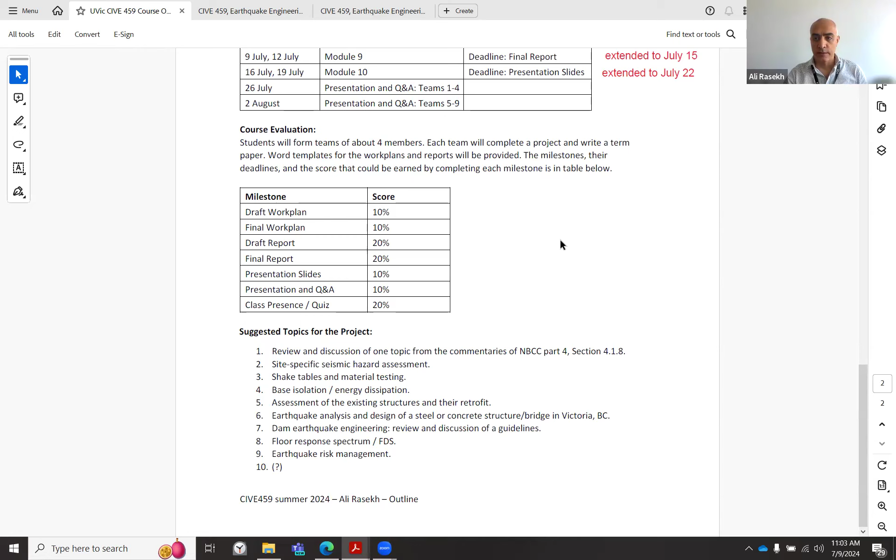We are now at July 9th, so getting close to the end. We were supposed to complete the final report by the end of this week, however the comments were delayed, so we extended it for a few days until the end of the weekend.

Behnam has done a good job leaving comments for you guys, and I'm hoping that it's visible. I asked him if it is visible to students, so write me in the chat or speak up if you can or cannot see the comments. They are reasonable, so if you can see them, start implementing them and really try to enhance your submission for the final. We will need very good reports from the teams. Hopefully you are quiet because you agree and you can see the comments.

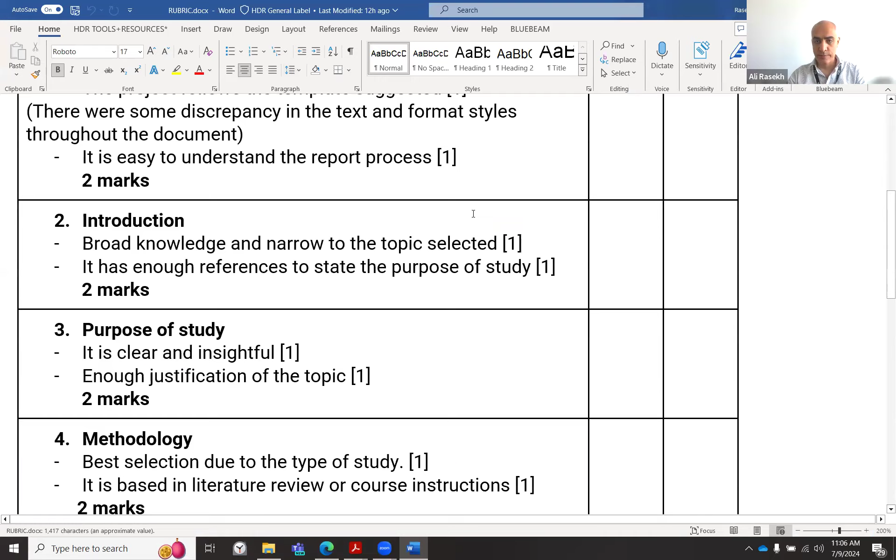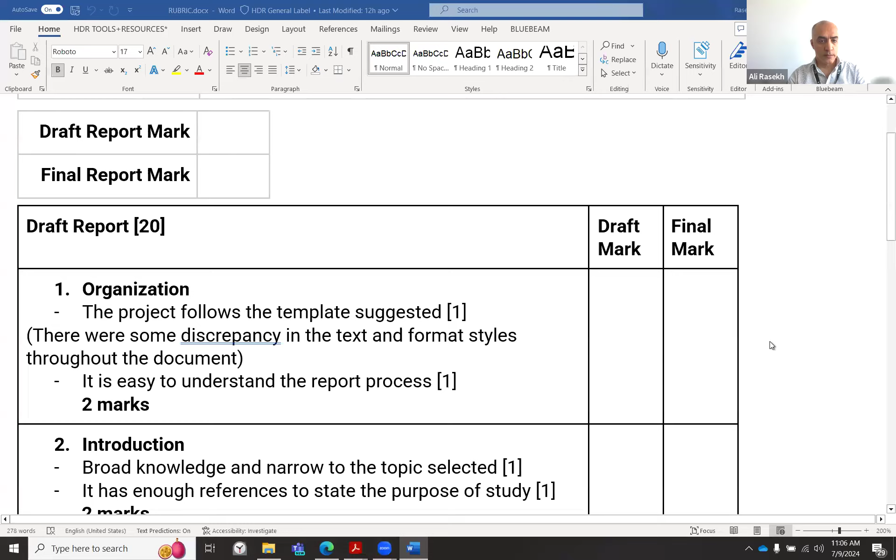So as I said, there won't be any mark or grade, but I can show this to you. Where is it? Under reports, I have the reports here. Just last night I created the rubric so that we mark all the reports in a similar manner, so that it's fair and people are judged or marked similarly. I was slightly late, so marks, maybe we will finish them in a couple of days. But right after this meeting, as you guys said, I will go to the reports one by one and press this publish. Right now, group 1 is published.

Then you go to the PDF, I will put that there. Thank you, like a good question. I will put that. I don't know which team this is, not your team Sarah, but anyway, the comments are embedded in the PDF and you can apply them. I don't know, maybe this group doesn't want other teams to see their work yet; at the end they will present and publish when it's final.

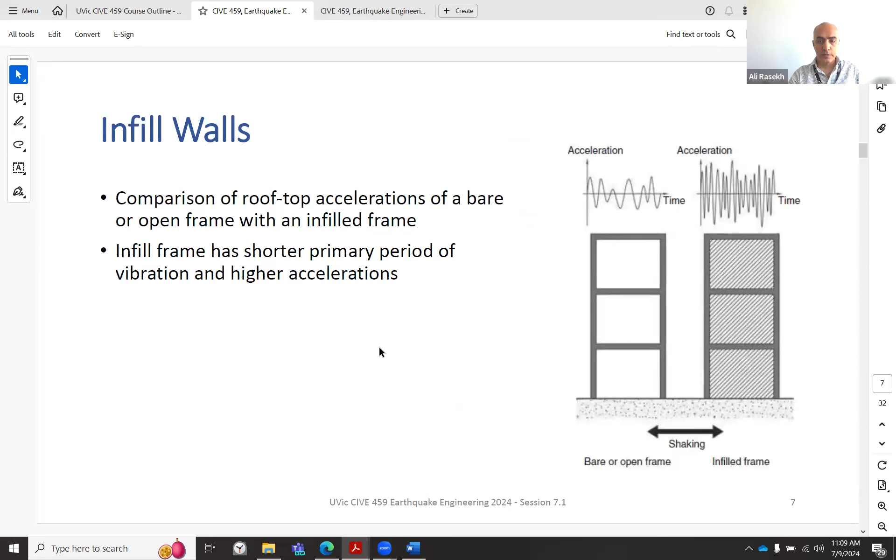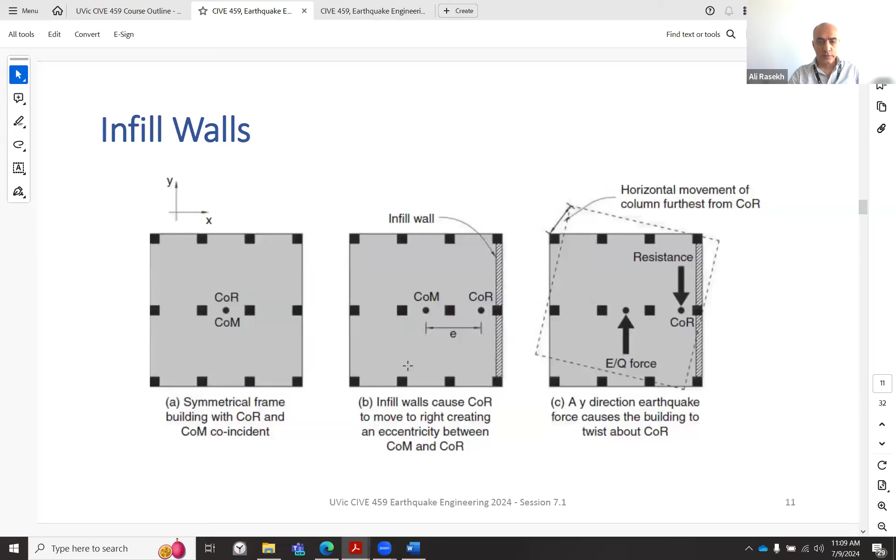Let's see, yeah, so we went through a couple of case studies. As I mentioned last time, I actually got these case studies from the Earthquake for Architects book, because I thought they have a nice discussion there, high level, good knowledge for structural engineers. I didn't want to just quickly jump into the equations. So just go through those slides again yourself, those are interesting discussions and a couple of good case studies, and you can generalize it to other similar situations that you will encounter.

Then we started looking at the equation, and this is a good estimate for the load on any non-structural member attached to the structure based on elevation. I try to rationalize it for you. So this is the weight of the member, and this component is like a factor of the spectral response.

The maximum spectral acceleration a structure sees at the ground level. And because it's at the ground level, we should take it up by some amplification factors to the level of interest. IE is the importance factor, the main primary building importance factor, so it's part of assessing the acceleration.

And the important factor here is this SP, that basically translates or transfers the base acceleration into the acceleration at the elevation of interest, at the elevation of your non-structural member, and it has components.

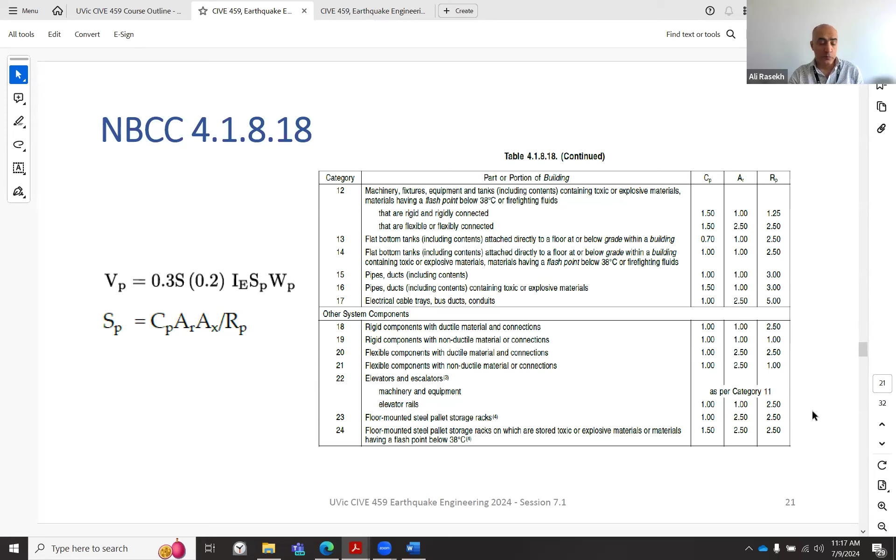So the rest of the table is for mechanical equipment and other system components—you can read them from here. Nothing much to it, just reading factors.

And there are some exceptions in that article 4.1.8.18, such as this one: when the mass of a tank plus its contents, or mass of a flexible or flexibly connected piece of machinery, fixture, or equipment is greater than 10% of the mass of the supporting floor, the lateral force should be determined by rational analysis.

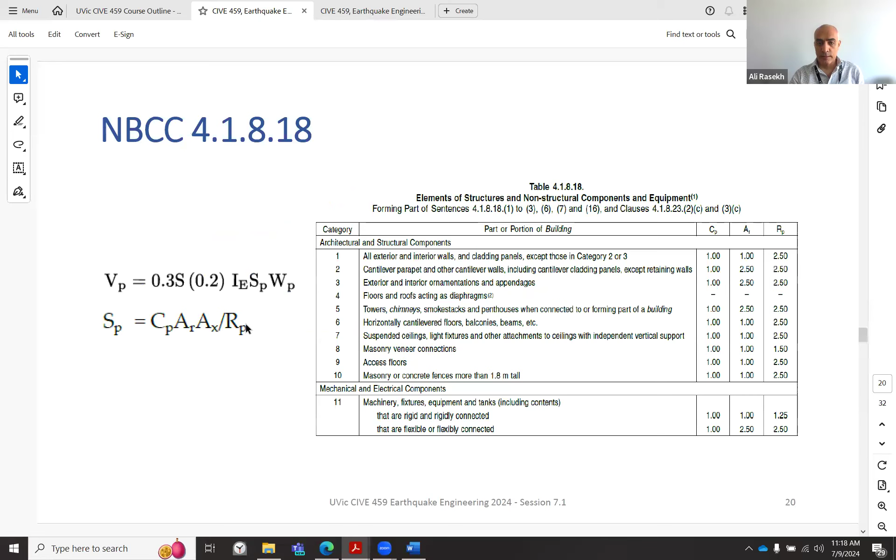Basically, the whole idea about a component, substructure, or element of a structure is that they are considerably lighter than the whole structure or the floor they are sitting on. So there is no interaction. Like, my furniture is much lighter than the floor, so the movement of the floor is not affected much by the furniture. It's only a one-way interaction, like the floor causes change in movement of the furniture.

But it's possible that the furniture is so heavy that it will change the whole reaction of the structure. By interaction, probably the best we can do, if you think the equipment is heavy, say you have an original SAP2000 model and you only included the floor weight, if that component is really heavy, add it to the floor weight. Then it affects the mode shapes of the structure and the response of the structure, and we can continue from there, just using the accelerations right at that location. So that's what I mean by rational analysis.

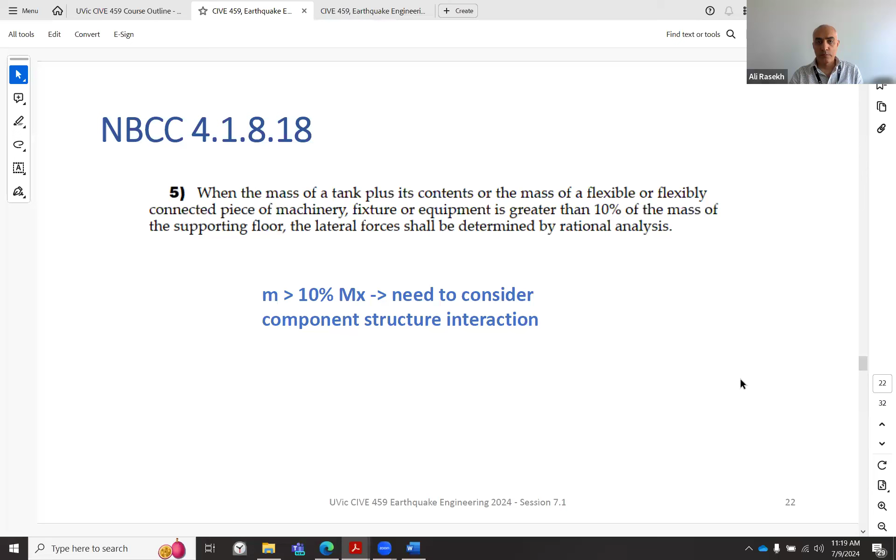Okay, now about connections. Connections to the structure of elements and components listed in the table shall be designed to support the component or element for gravity loads. The connections should also act for gravity, shall conform to the requirement of sentence 1, and shall also satisfy these additional requirements.

Except as provided in sentence 17, friction due to gravity loads shall not be considered. RP for non-ductile connections, such as adhesive or power-actuated fasteners, shall be taken as 1. Remember that RP has a similar function as R in the main structure, but this is about the ductility of the component. If the ductility of the component is 0, then you don't reduce the forces.

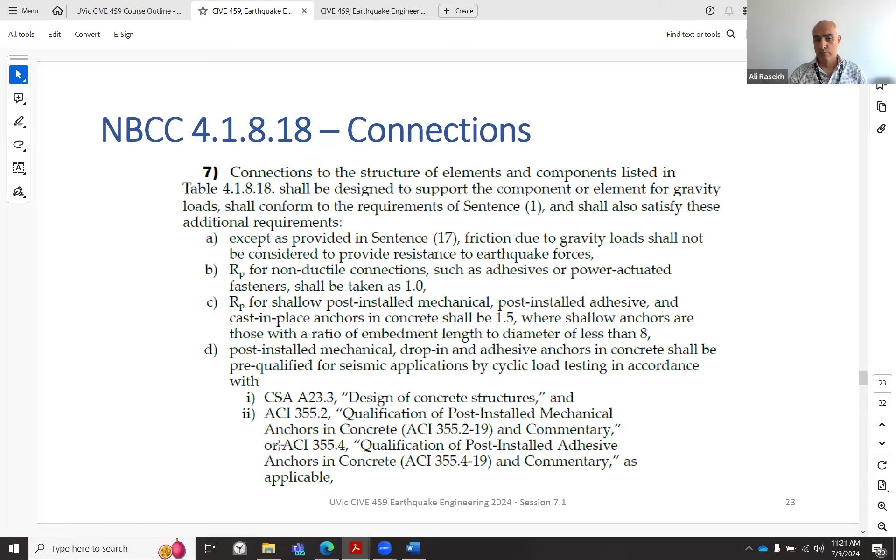RP for shallow, post-installed mechanical, adhesive, and cast-in-place anchors shall be 1.5. So another comment about using RP: post-installed mechanical, drop-in, and adhesive anchors in concrete shall be pre-qualified. There are rules and regulations about the pre-qualification. Maybe you call the vendor and ask if they have done tests, or they have documents saying they have done those pre-qualifications. So be aware of those.

Post-installed mechanical and adhesive anchors in masonry, and post-installed mechanical anchors in structural steel, shall be pre-qualified for seismic applications by cyclic tension load testing. So again, you should be aware of that and ask the vendor. Power-actuated fasteners shall not be used for cyclic tension load.

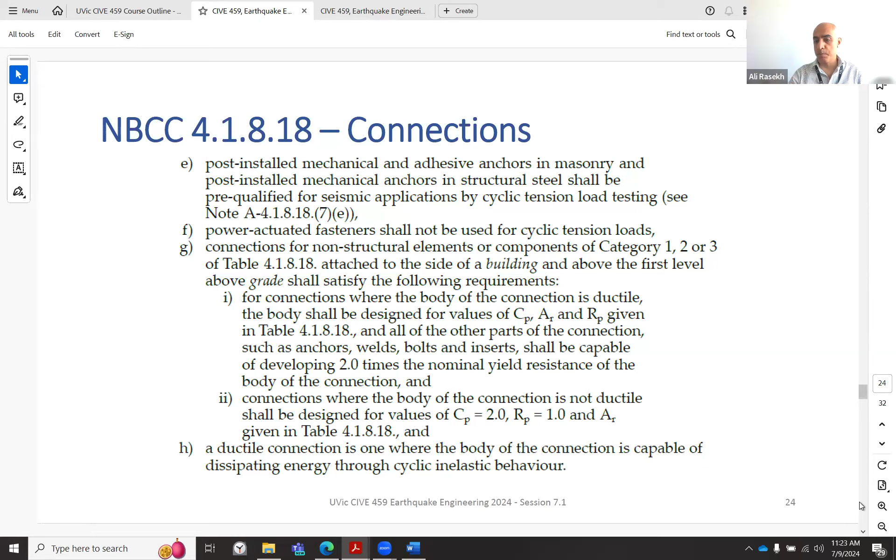For suspended units—isolated suspended equipment and components such as pendant lights—may be designed as a pendulum system, provided that adequate chains or cables capable of supporting 2 times the weight of the suspended components are provided, and deflection requirements are satisfied. So that factor of 2 for pendulum is important, like you assume you have twice as much weight.

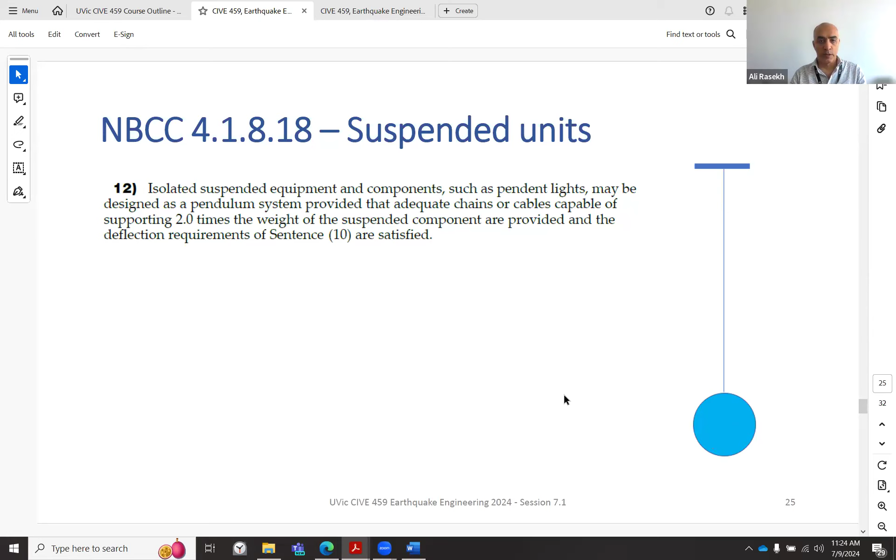Going to the concept of floor design spectra—I can do this one quickly too. That's more for people who want to use the result of analysis from a computer model instead of the equations we showed. Just trying to say, we have a design spectra, an acceleration design spectra at the base of the building, which is related to the ground, and we should be able to obtain a similar design spectra at the higher floors. That's what they call floor design spectra in buildings.

And sometimes in non-buildings, we keep using the same terminology, which just means a spectral acceleration at a higher elevation. I sometimes think a better terminology would be in-structure design spectra, but its more popular name is floor design spectra.

Basically, floor design spectra is developed from the response of a structure to the earthquake. What should we do? What are the steps that we take?

Perform response history analysis, also known as time history analysis, for a set of earthquake records. So you have your building and a set of earthquake records, you run them, or measure the response of the building to all those earthquakes, record the response of the structure at the points of interest. Then you develop floor response spectra for the recorded responses. We talked about how we can use time histories of acceleration and change it to spectral acceleration, which is basically the maximum responses.

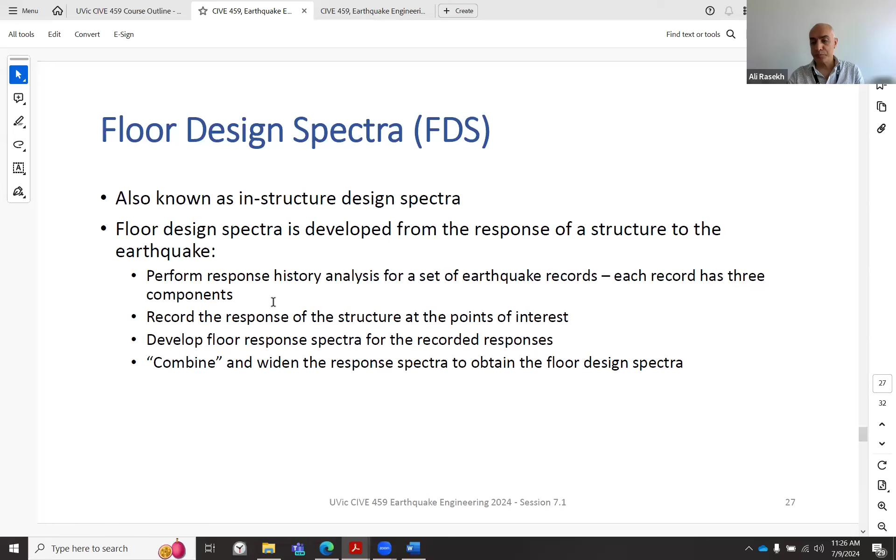This is more schematically. So there are steps that are taken for your typical dam in order to get the response at the top of the dam.

I said we use that equation, the code given to us, we can use it, but this is not really for buildings. That equation is more suited for buildings, or optimized for buildings. But for other structures, it could be used maybe for checking, for double checking, but nothing more than that. Going through the steps that you get for your other buildings or even for your high rise.

You have your target spectra, and then a seismologist basically translates your target spectra, that maybe you got from NBCC, to a bunch of earthquake histories at the ground level, called firm ground. Maybe they get it for the firm ground level, and then they modify it to the real ground level based on the site-specific rating of the rock.

So you have these accelerations, you apply it to your model, and then you read the amplified accelerations on top of the dam, and then you do the reverse of this. You change those accelerations to what is called floor design spectra, which is much higher than the input spectra.

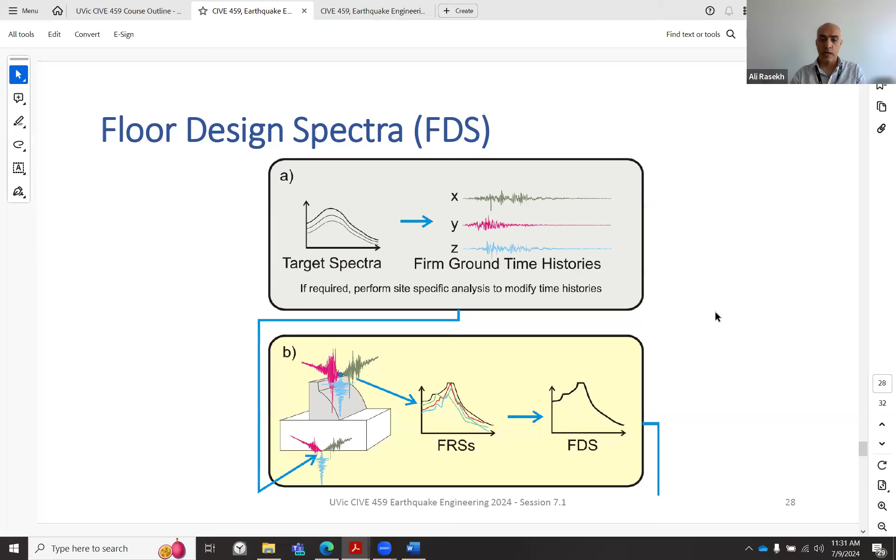And I said that we have floor response spectrum and we want to create the FDS. Normally, if we have many earthquakes, we use the mean. So we create, or ask the seismologist to give us, in the latest code, 11 is like a regular number. Previously it was like 7 or 5 or 3, but now a lot of times we receive a set of 11 earthquakes. So if you have an analysis on 11 earthquakes, which is 5 or more, and we want to assess the design, a lot of times like for gates, we just average them. I do that a lot, so averaging a bunch of responses into the design spectrum.

Just to get rid of this issue. And then after averaging, you have this greenish curve, which is the average between a bunch of curves.

There is another procedure called widening. Basically, we try to widen every point on the curve, make it more conservative. The top reason for doing the widening is that maybe because of modeling errors, we mischaracterize the period of the system, and we want to create some safety. So by widening it, maybe I characterized my period to be here, and the average is pretty low, while the real period was here. So this causes me to really use the response at this location, accounting for that mischaracterization. Maybe sometimes we are not even aware of certain features of the structure.

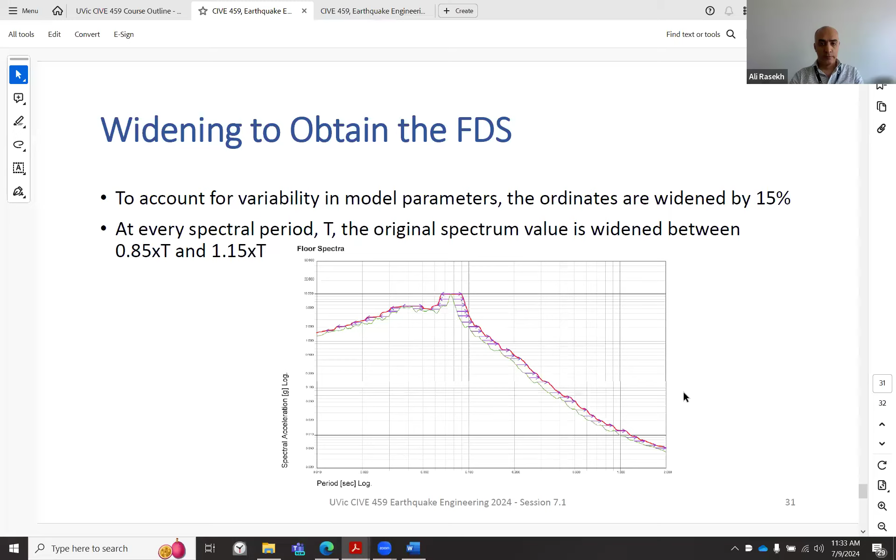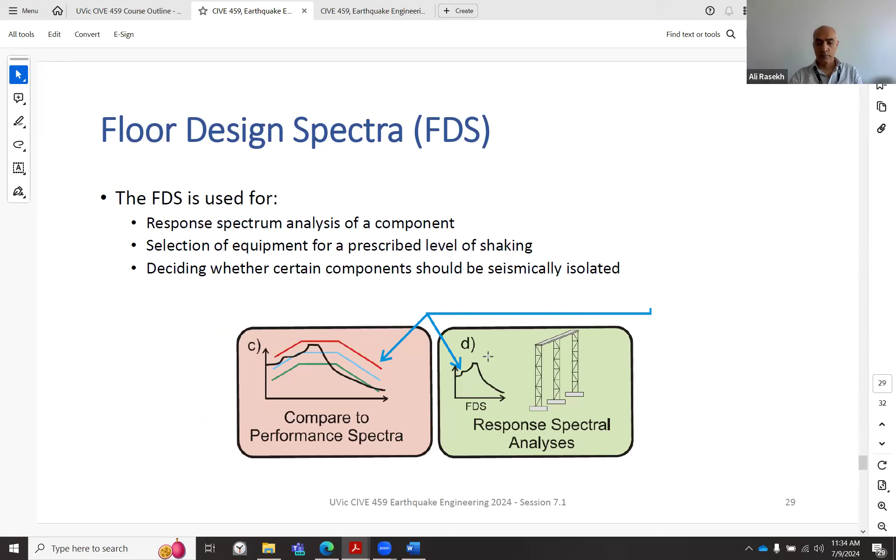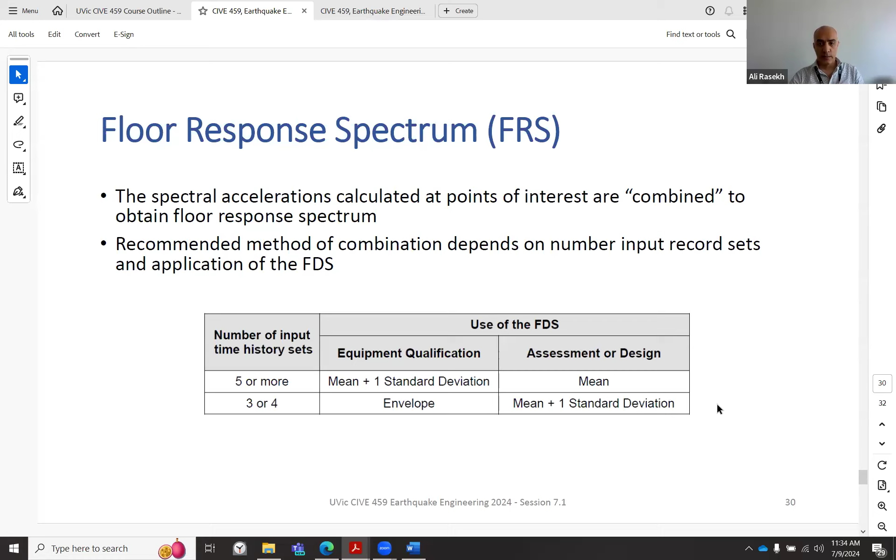Okay, all done with this. So in summary, we talked high level about the components in architectural terms, and the code requirements. Because these days people do more and more analysis and really want to obtain everything out of analysis, we covered the analysis method at a high level. So we have three features: the good understanding, the code solution, and the analysis computer modeling solution.

Any questions or comments before I proceed to the next module, which is still steel. Okay, I'll wait for about 1 minute.

Okay, we continue with steel design for earthquake. We just finished the most important section on National Building Code of Canada requirements. Now we'll go through steel and concrete and hopefully wood. I don't think I have anything from masonry. But in general, steel is the most important because it's like the poster child of ductility and favorite concepts in earthquake design. So if everybody, and myself, fully understand steel design and how ductility plays a role, then I can generalize it to other materials which are less ductile, but we make them more ductile by proper detailing. Steel is ductile by nature.

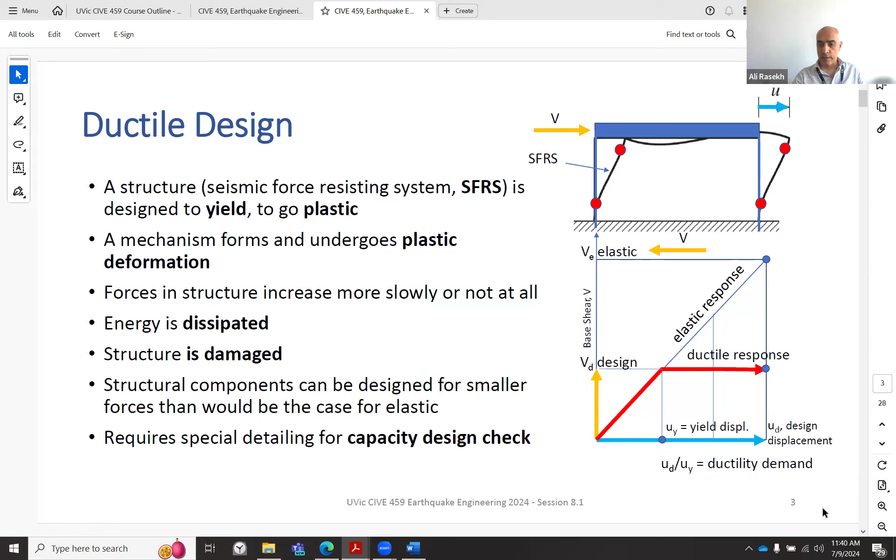So the context we are taking now is in terms of steel. Steel seismic design: steel is a highly useful material for seismic applications. It has high strength, high ductility, and the ability to design and analyze with a high degree of confidence.

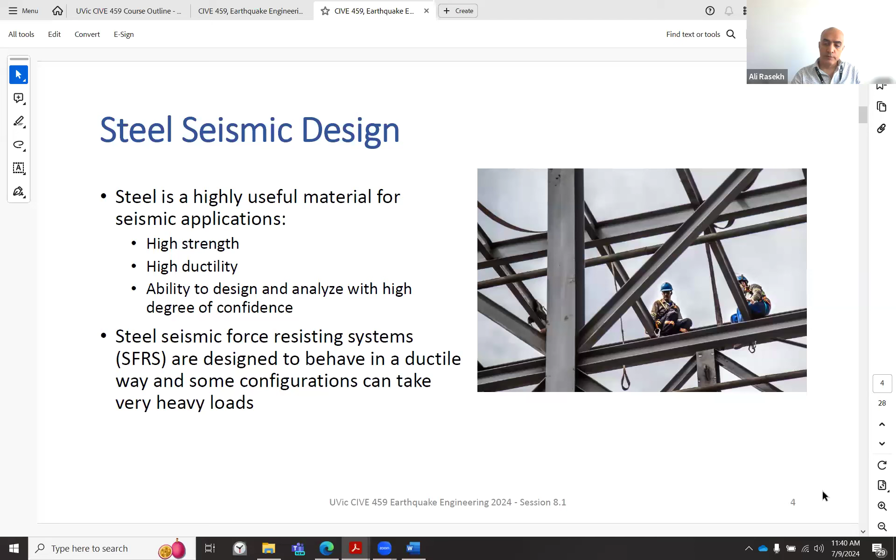Steel seismic force resisting systems are designed to behave in a ductile way, and some configurations can take very heavy lateral loads. We previously mentioned that, but we will discuss it further.

As I said, steel is like the poster child for ductile behavior. So we have the material level behavior of a steel.

It's a stress versus strain relationship that you must be familiar with. A steel just deforms up to some level where yielding starts. If you keep pushing, it will yield further and further until it has reached quite large deflection. Another feature kicks in, called strain hardening, then it becomes slightly stiffer until it fails.

So the different parts are elastic range versus inelastic range. And within inelastic, we have the flat yield range versus the strain hardening range.

If you do a cyclic test on steel, if you increase the force within the elastic range, it will go back to where you started. When you yield it slightly and then release it, it will have permanent deformation because it will spring back as if elastic, and therefore a permanent deformation remains. It's called residual strain at the strain level, or residual deflection.

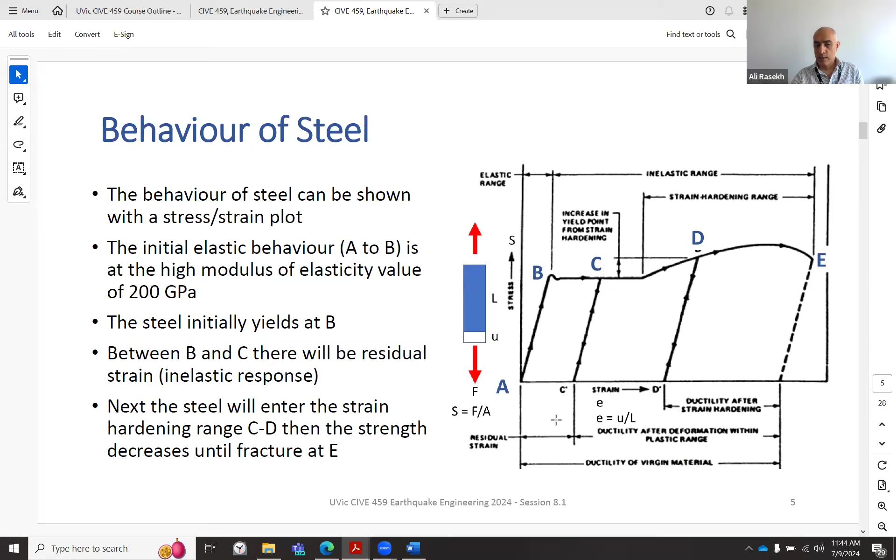Cyclic behavior: the red line shows the elastic behavior, at least up to this point where there is no strain hardening. But if you do cyclic loading - load and unload, load and unload - as we said, A, B, C, then we come down to C prime, and we can go further down, yield again, and go through a cycle. The cyclic behavior causes dissipation of energy.

That's something beneficial to us, something we like to see. This is showing displacement versus force for this bracing system. However, we can take full advantage of this system only if we have proper detailing, meaning proper capacity protection for other members. Otherwise, part of the load path, which is non-ductile, will break, and you will not see this beneficial behavior - like a connection might break if it's not capacity protected.

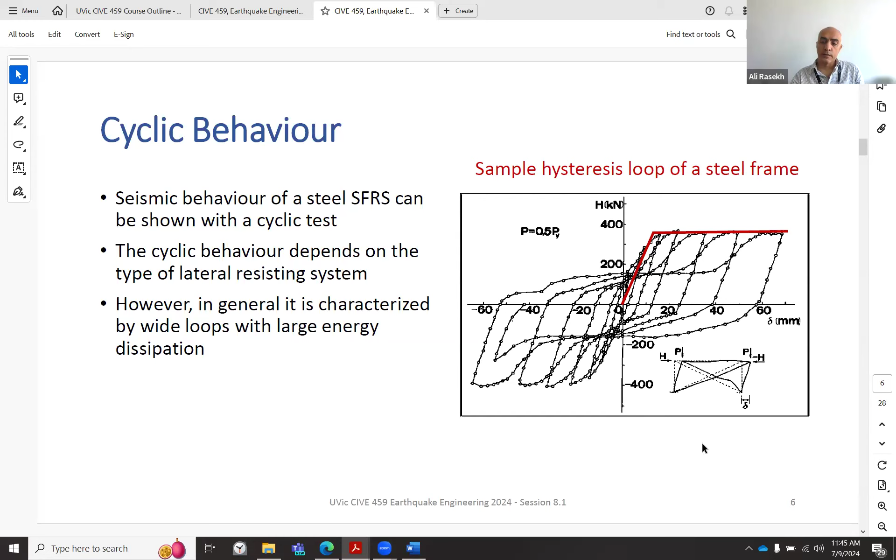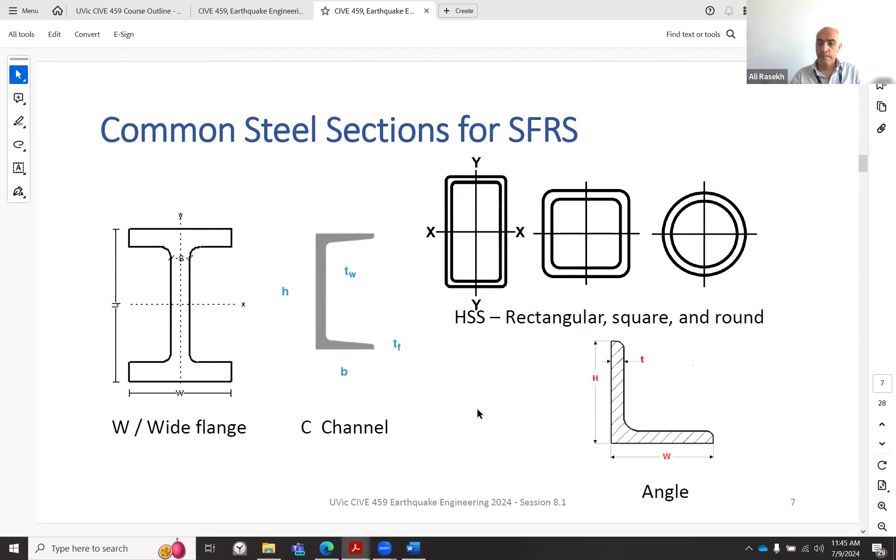Common steel sections used in seismic force resisting systems: I shape or wide flange, C channel, HSS in different shapes, and angle. You should be familiar with that - probably you have taken a steel course.

We talked about how the behavior is at the material level, now at the section level - how that material behavior causes the behavior at the section. We normally design for less than yielding. Therefore, the distribution of stress versus height is something like this.

If you apply this moment, the top flange is in tension and the bottom flange is in compression. If we gradually increase the M, the material yields, and therefore the stresses cannot really go beyond Fy. So instead of a full triangle, there's a limit of Fy.

We can imagine the force increases so much that almost this whole length is in tension at yield, and this whole length is in compression. That's the level we call the plastic moment. And in terms of moment...

This section cannot take a higher moment, but it can keep on rotating. After that, the force doesn't change, but rotation can increase until there's rupture. If you forcefully apply a force which is more than MP, it can withstand up to MP, but then it keeps on rotating until it ruptures. So that's a basic idea about plastic hinges.

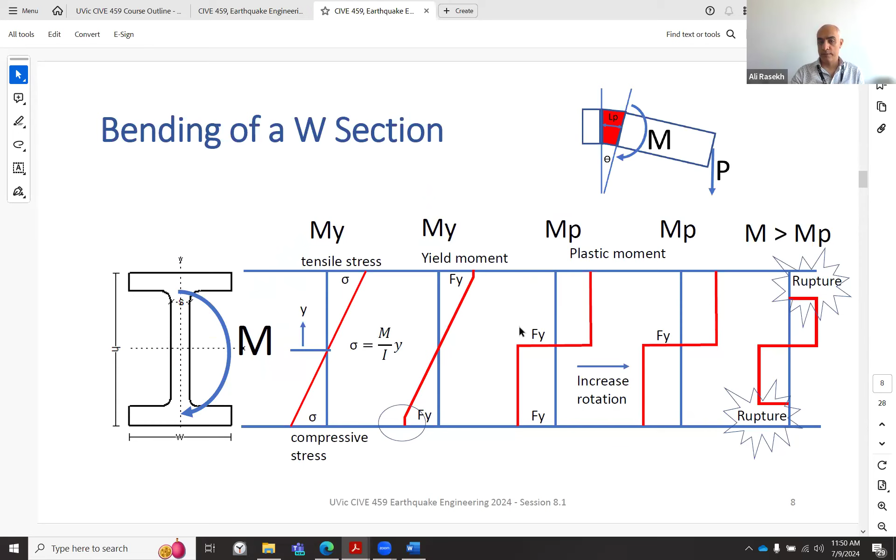The idea of compact sections: the more compact section is the more stable plastic hinge. Maybe you already saw that in your steel course. It basically means more beefy, because if it's too thin, especially the flanges, they may buckle before they reach Mp. So before they reach Mp, if this is too thin, they will buckle in, therefore they cannot really reach Mp. That's why the code discusses compactness.

It talks about different classes of compactness. Class 1 can develop the Mp, so that's the beefiest one, and sustain cyclic rotation beyond theta P, even after it reaches theta P. Theta P is the rotation when we have a plastic hinge. It can even rotate more and will not immediately break. It can sustain really, it has excellent ductility. It can get into the plastic range rotation, and then collapse at a much larger rotation. So class 1 is the ideal for ductile behavior.

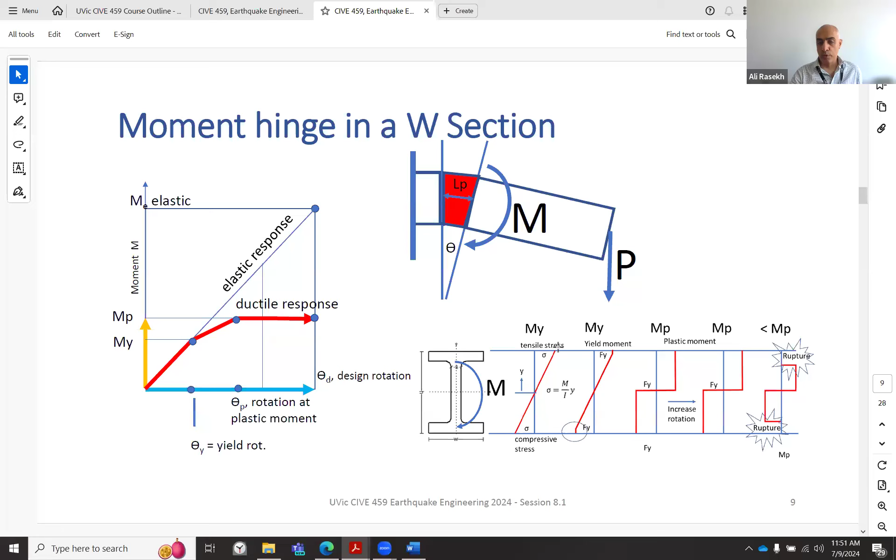Class 2 just reaches Mp, but nothing more. After Mp, it really buckles and is not usable. Class 3 at least can reach My, which means it can work and get to borderline yielding. Class 4 cannot even reach that, and it will buckle even before the moment reaches that level. So we should be aware of these classes.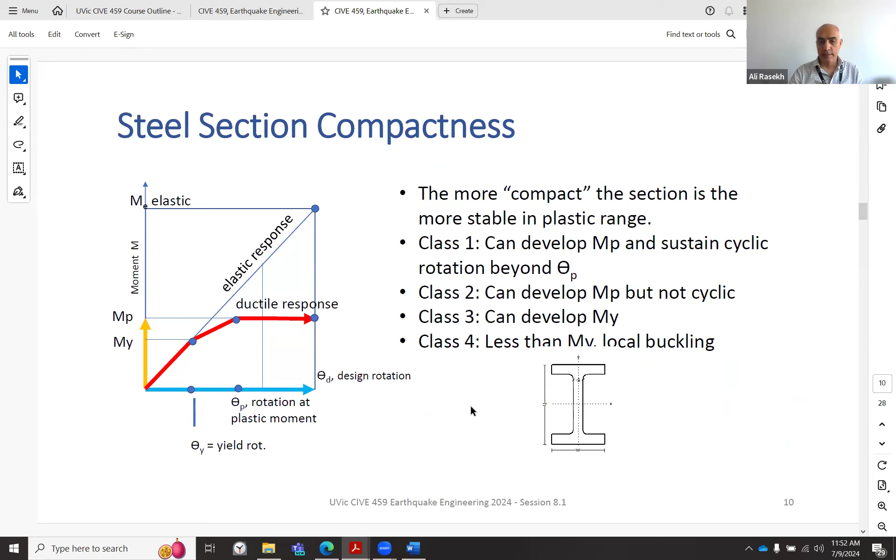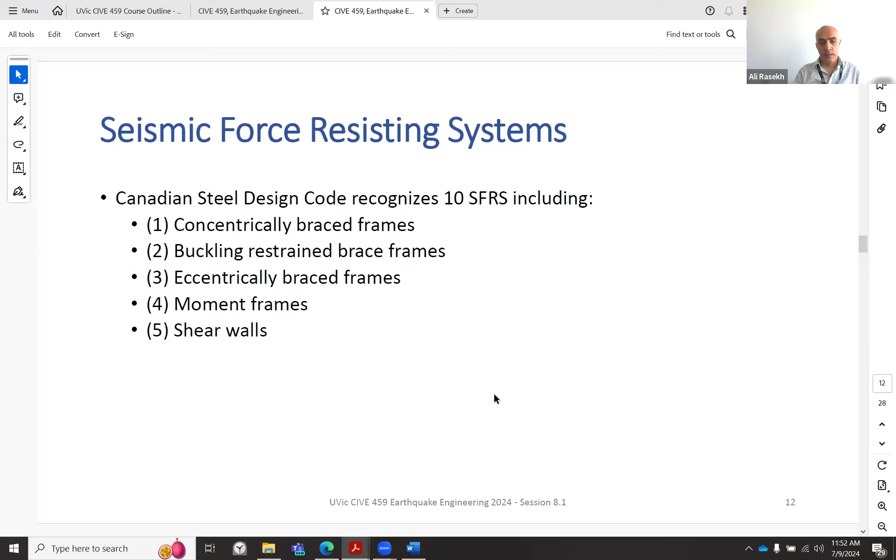So, seismic force resisting systems within the context of steel, the Canadian Steel Design Code - we get into that in the next session. However, it is almost the same between different codes. There are recognized as 10 different seismic force resisting systems. I don't know all of them, but these 5 are the important ones: concentrically braced frames, which we introduced; buckling restrained brace frames, I will show that to you; eccentrically braced frames, which we briefly mentioned; moment resisting frames; and shear walls, meaning steel shear walls.

Concentrically braced frames, meaning that the 2 braces are meeting each other - CBF, let's call it CBF. CBFs are vertical cantilever trusses that resist seismic load through axial tension and compression in braces. So one brace is in tension and yields, the other one is in compression and it may buckle, except if we prevent it. It is the simplest system and has a high lateral strength and stiffness.

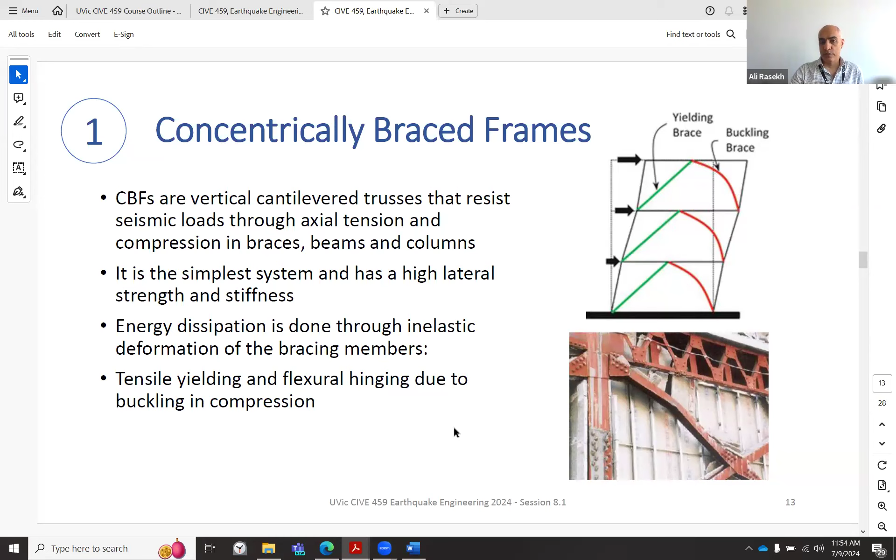Energy dissipation is done through inelastic deformation - both yielding and buckling will dissipate energy. However, note that although buckling dissipates energy, it's like out of control, it might buckle in any direction. So we don't really like this buckling; we prefer to prevent it or not be dependent on it. There is tensile yielding and flexural hinging due to buckling in compression. So when this buckles, parts of it become in tension or compression, mostly in compression, and there might even be plastic hinges because it bends a lot when it buckles, and those mechanisms dissipate energy.

A typical test on the shaking table on concentrically braced frames, just showing good nature in terms of dissipating energy and yielding. Looks like somebody has used the program Drain 2DX and compared it with experiment - they are on the same line, comparable, good match. So the behavior in Drain 2DX accounts for the yielding, tension, and plastic hinges. The phenomena we discussed, yielding in tension and plastic hinging in compression, has been good enough to explain the behavior because Drain 2DX and experiment match well.

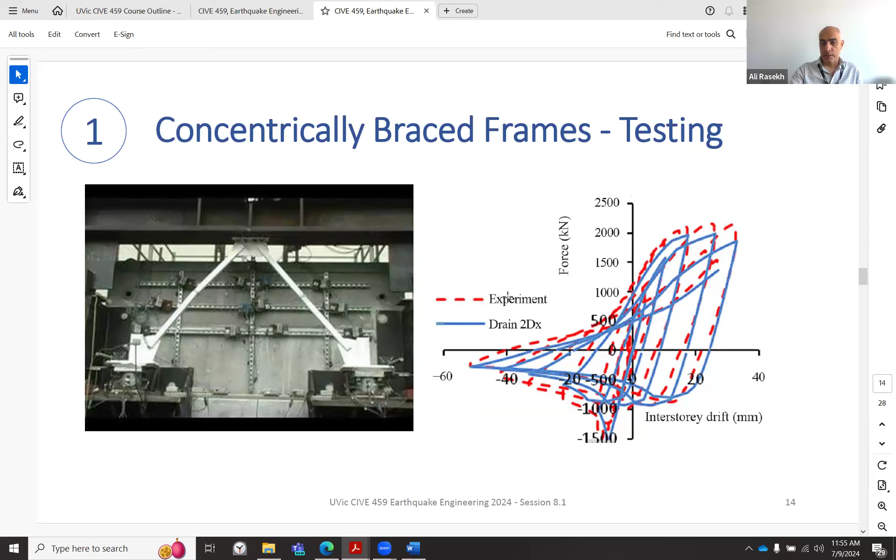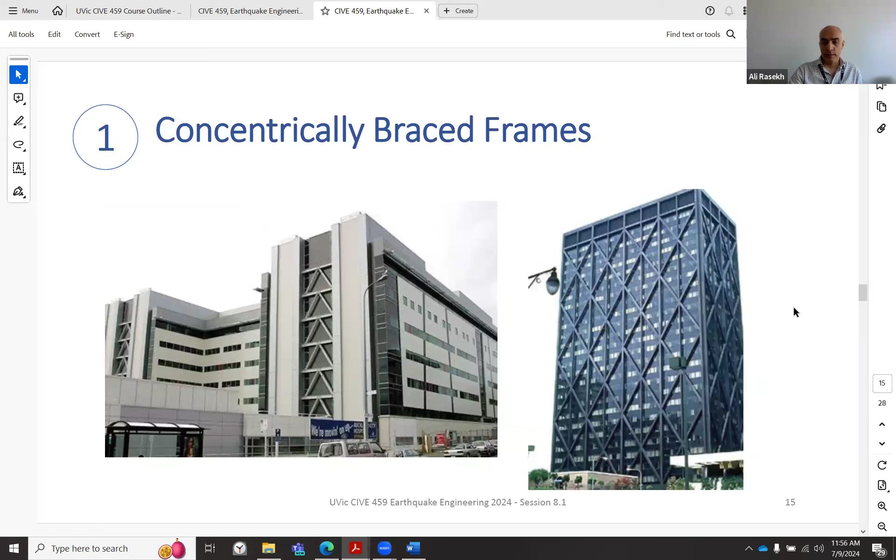Example of concentrically braced frames, where the 2 braces meet each other, say here at the floor level, they meet each other. They might also just cross each other. This one appears to be crossing each other, but it's a lot more than 1 floor - each of these crosses spans multiple floors, maybe 6 or 7 floors as I can estimate. Even this one could be more than 1 floor, so it's not exactly correlated with the flooring system, although in a lot of typical buildings that we design, it's like 1 bracing bay per floor.

As I said, the tensile side, yielding or dissipation of energy, behaves well. The compression side, which means buckling and creating plastic hinges, appears to be out of control. So definitely it's not a favorite.

There's this idea to prevent buckling. In this system, maybe using concrete or steel, we try to cover the bracing so they don't buckle out and only yield in tension and compression, which is a phenomenon where energy is dissipated.

So the bracing members are restrained using tubes, which could be concrete. Often bracing members are procured from a vendor, since they are not really constructed in place because it's difficult to analyze and design to prevent buckling. A vendor has done that and sells pre-tested members, and they should be tested as well since sometimes analysis isn't good enough. They make sure no buckling happens with that sleeve.

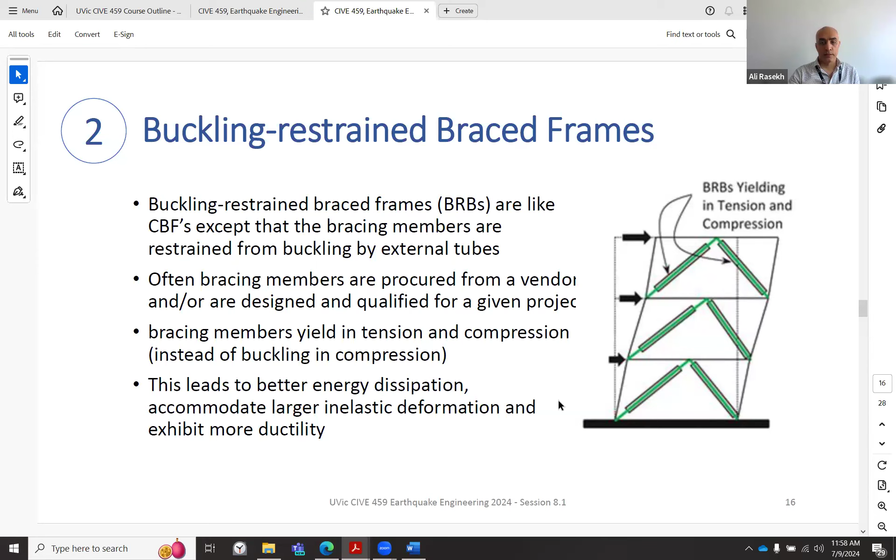Another view showing the section of a typical buckling restrained brace. As I said, there is a sleeve, a combination of a steel tube and concrete inside. However, this core is really the bracing that you are designing for. In most cases I don't assume the steel tube is part of the lateral force resisting system. The core is, and using the steel tube and concrete sleeve we try to prevent buckling.

So that's the way it's made. And here it shows that BRBs, the buckling restrained braces, act nicer in both tension and compression in both directions, while this is a typical result for this setup. It acts well if it's not restrained.

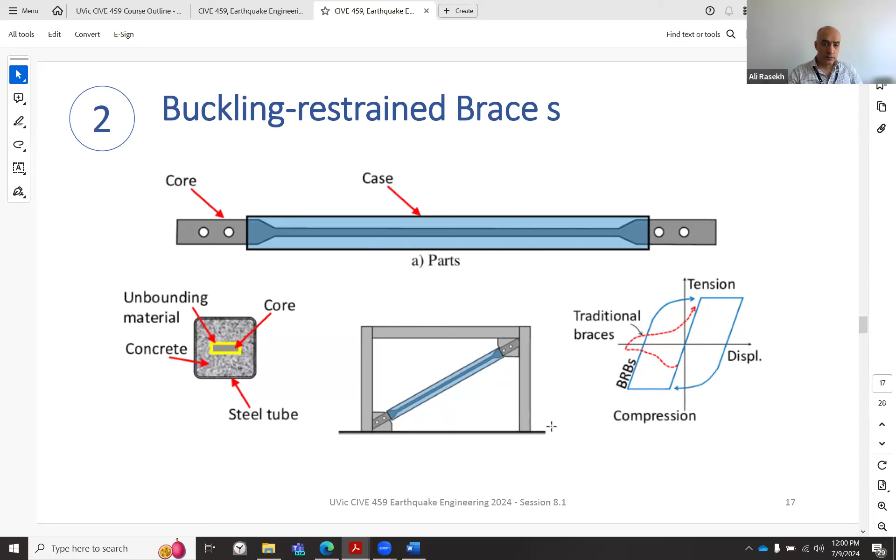It acts well if it's traditional. It acts well in tension. In compression it suddenly buckles and behaves poorly. Then in tension it behaves okay. While the blue line, which is the buckling restrained brace, acts well in both directions and dissipates a lot more energy. That's the idea behind it.

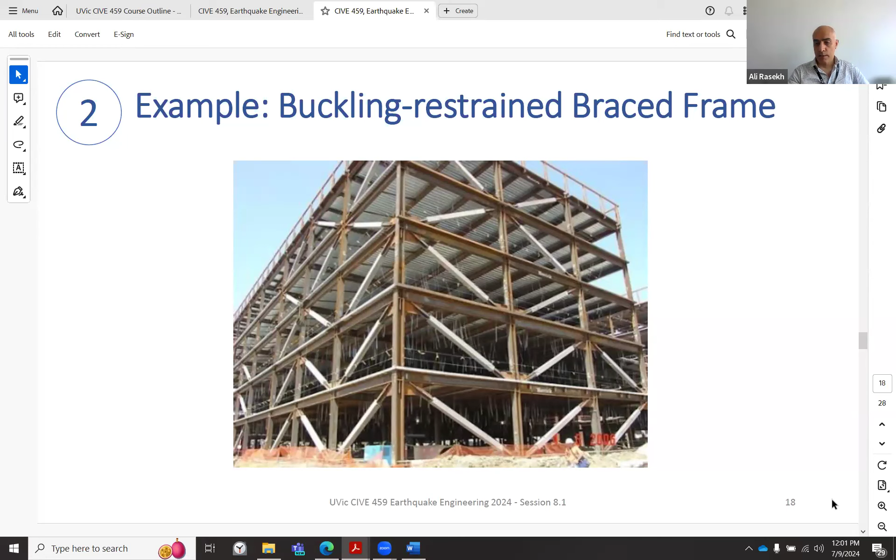Eccentrically braced frame. These are success stories that were innovated more recently, comparatively. What we do in this design is that the two braces don't meet each other, they are eccentric, and part of the beam is actually between the ends of the braces. That part of the beam is the main energy dissipation strategy in the eccentrically braced frame.

It yields in shear, so it's called a shear link, sometimes a shear link. That yielding helps dissipate a lot of energy, and it's under control and limited. In this area, in a severe earthquake, you could have yielding, and you have the potential to only repair this area.

So the bracing members do not meet at the same point. The link beam or shear link beam is designed to yield and dissipate energy. Yielding can either occur as shear in the web or in flexure at the link beam ends. Mostly it's shear, but it can be bending as well.

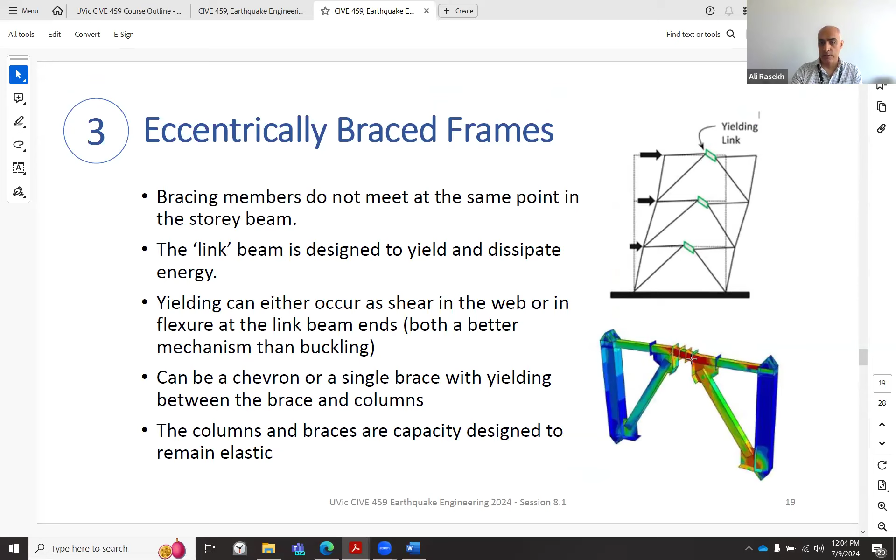There have been a lot of tests in the past couple of decades to verify that they behave well, and there are recommendations on how to detail them. You see these plates welded to them shown here as well. They could be part of a typical design, or maybe even provided by a vendor, so you just connect this link between these two points, and supposedly after the earthquake we can remove it and replace it with a new one if a severe earthquake happens. So they are well behaved.

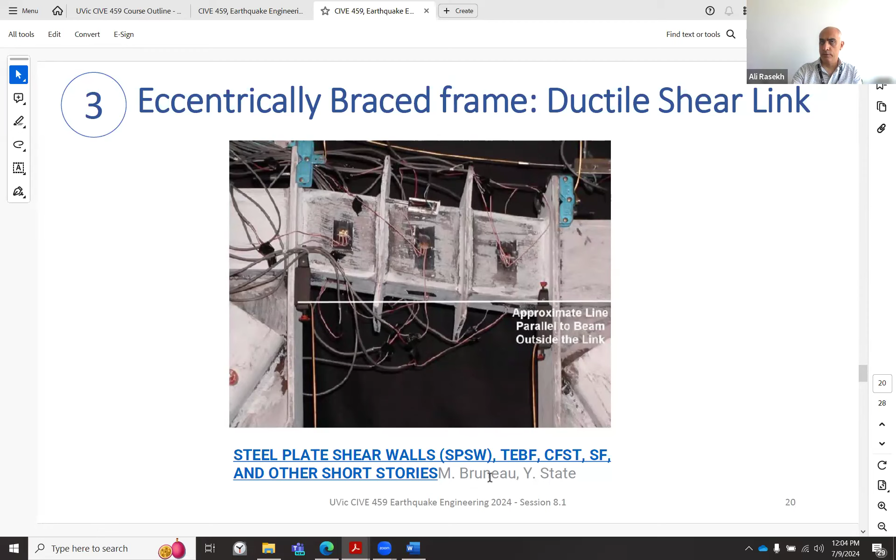There's a link here by Dr. Bruneau, who is very famous, but you can read through this link. He has done a lot of tests. I think he's in State University of New York or something like that, in Buffalo, so he's quite famous.

Using eccentrically braced frames in real cases. The two braces don't meet each other; there is a link in between. The energy is dissipated mostly through shear.

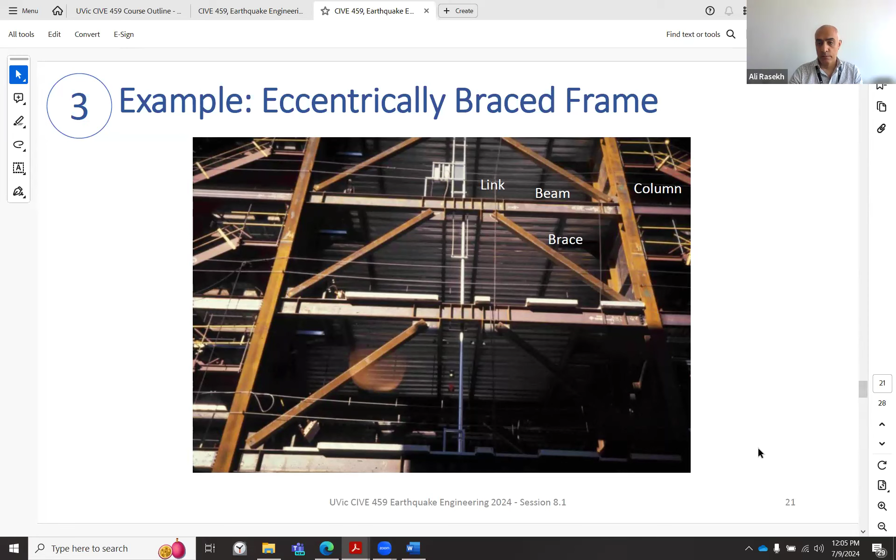Moment resisting frames, we previously discussed, where beams and columns are rigidly connected so that they can transfer moments, and that will cause...

...plastic hinges to happen in beams and columns. We prefer, in buildings, most of the plastic hinges to be in the beams, so that you can easily, or more easily, replace them if needed. Replacing a column is a lot more difficult. You can at least look at it that way. Besides, the column is the main gravity load carrying system, and yielding of the column endangers the stability of the whole structure, so we prefer plastic hinges to happen in the beams.

Moment frames are very common due to their ability to have clear space. Your architect will also like it because there's a lot of room for openings, since there's no bracing or shear wall to prevent them. Lateral resistance is provided by full moment resisting connections at each level.

So moment resisting connections at each connection between beams and columns. Energy dissipation is achieved by yielding at the member ends. Normally, the maximum moments during an earthquake for the side load are at the ends. Typically, if you do a few trial and error tests, you'll see that for lateral load, earthquake or wind, the maximum bending is at the ends. For vertical load on beams, the maximum is in the middle.

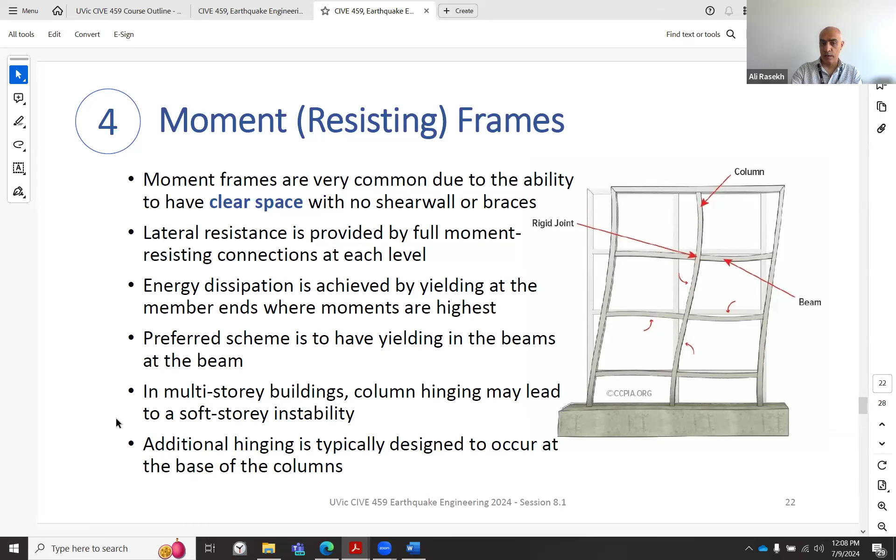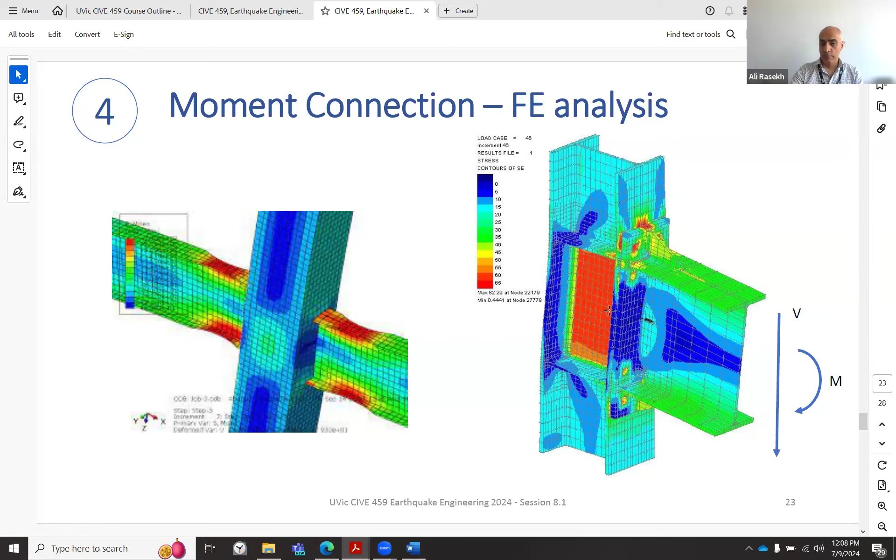...a lot of shear actually happens in this panel. It's again sort of a shear panel, and therefore it should be designed properly, with stiffeners at the ends of it, or maybe sometimes even in the middle, to avoid buckling in this plate. In this other case, the highest stresses are in the flanges, and that's exactly where we want them. We want them to be in the flanges, and that indicates that the plastic hinging is happening right here and here.

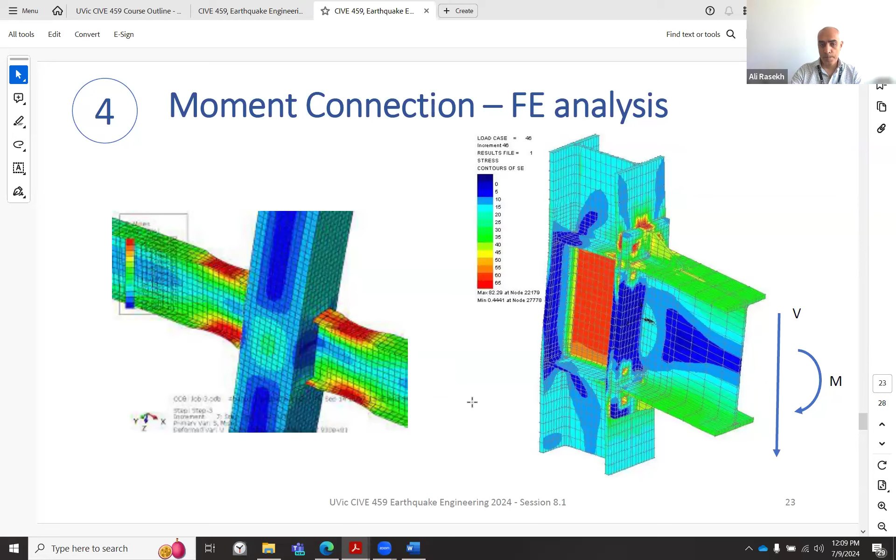There have been many, thousands definitely, of tests done around the world, because in some earthquakes the moment connections were behaving poorly. So there was a reason for researchers to test it a lot to make sure which configurations are better. Therefore, it's recommended to use correct configurations that account for the shear zone being properly restrained, etc.

So our final intention is this picture: we want the plastic hinge exactly, and yielding happens exactly where we want it to be, at the location intended for plastic hinging, and we don't want unwanted yielding in other locations.

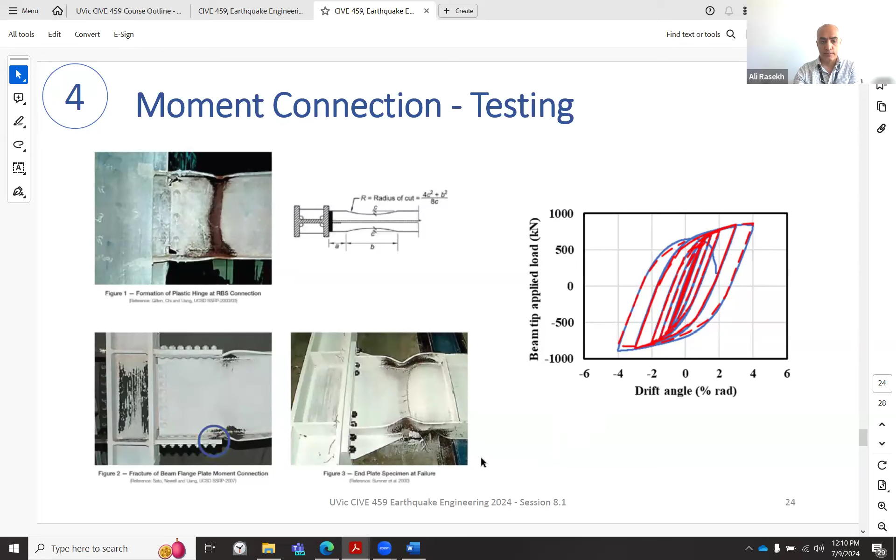So there are examples and even guidebooks with a lot of approved connections that are tested and pre-qualified, especially state-of-the-art ones. They have good testing systems, and we know which ones are verified.

Shear walls, it's like using a steel shear wall. For very tall buildings, I haven't seen, or maybe I didn't pay attention to, buildings where the only resisting system is a steel shear wall, but theoretically it's doable. You can have steel plates all the way through the height so that they act as shear walls.

Lateral resistance is provided by a steel plate welded into a frame. Energy dissipation is achieved by yielding and buckling of the panels, which is okay.

Tall multi-story shear walls will behave like a flexural cantilever. So that whole system is like a flexural system. After you add the shear wall, they act like a flexural cantilever. They are often coupled with a frame, resulting in a hybrid response.

Shear mode deformation in rigid frame, flexural mode deformation in shear wall. So shear wall normally has a bending behavior, not a shear behavior, while in moment resisting frames you will have more of a shear type of behavior.